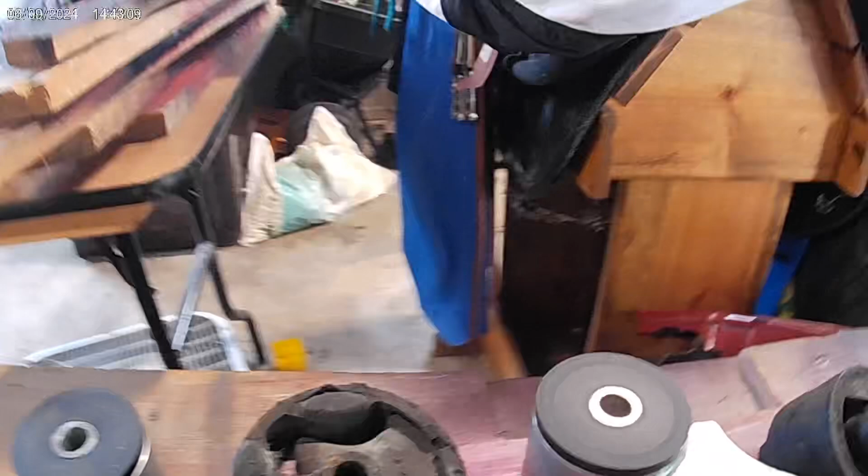Okay, so this mount here is actually a transmission crossmember mount, which goes in the front near the radiator support, and this is the one that goes in the back near the firewall. The most difficult one to try to swap out. Yeah, so this is the pain in the butt boy here.

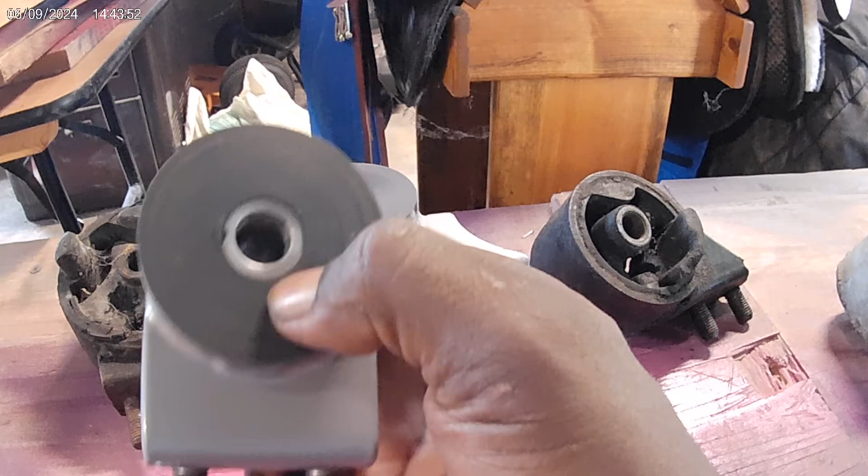So basically what I wanted to do is show you guys how the AWR mounts are made, how thick the brackets are, and the overall mount seems like it's very, very solid. And the rubber and everything, the collar, all that stuff seems really great quality.

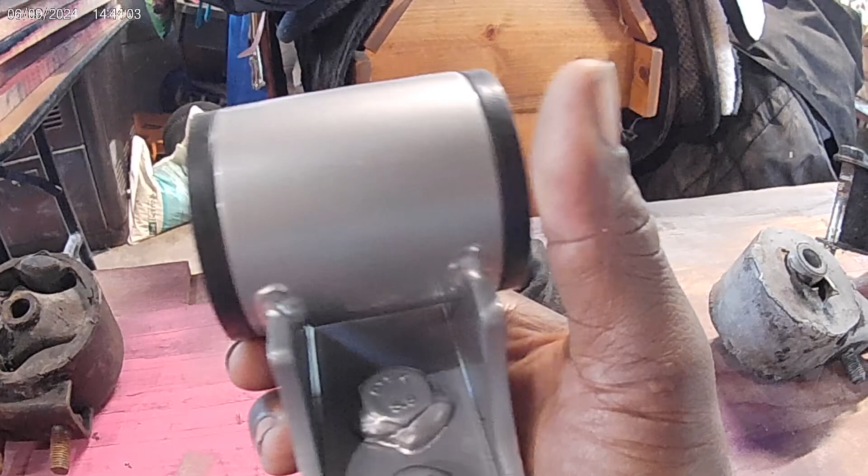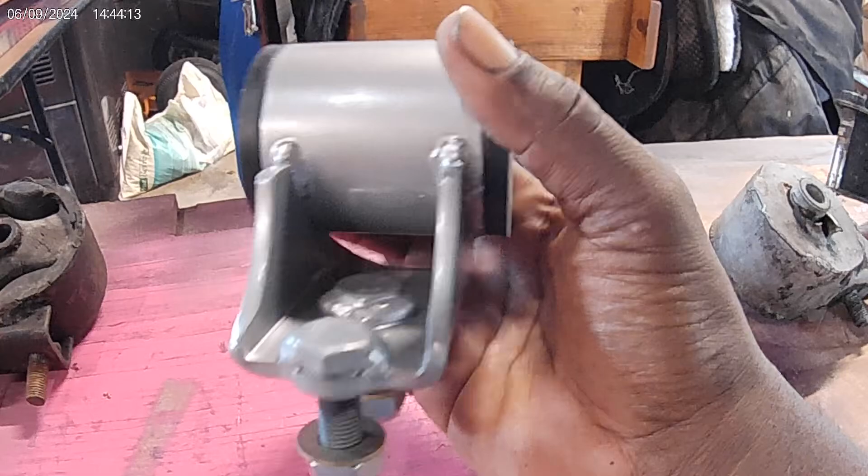I know a lot of guys use these and swear by them. This is my first set, so I'm sure I will not be disappointed at all. But just the construction of these mounts is just awesome, man. They did a wonderful job on this. This is great. The quality of work here is definitely A1, 100%.

And like I said, I know a lot of guys swear by these mounts and have had good results. And I'm sure I will too, especially for what I'm doing with these mounts, drag racing. So yeah, those are basically the AWR mounts, and of course these two mounts here are going to be replacing this bad boy and this bad boy.

Now, so I'll get into a little bit of this. So, of course, as you can see, these mounts, the only thing that's really supporting this rubber is here and here. That's about it. I mean, but it's a factory mount.

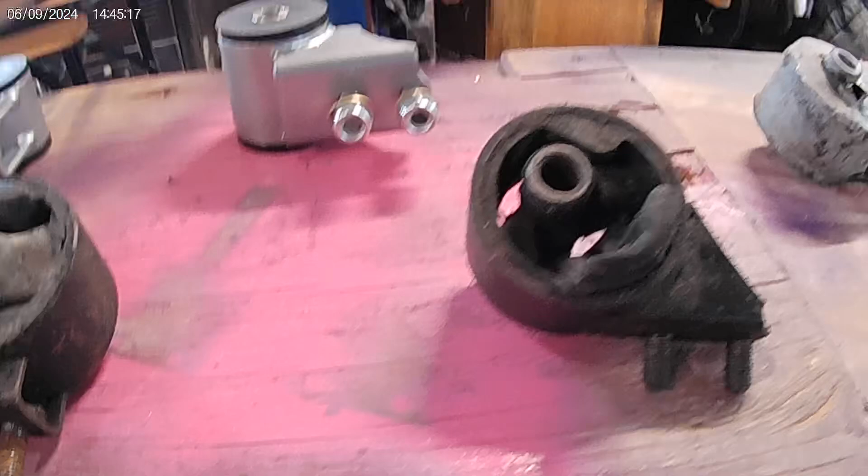You know, these cars, they build these mounts for daily driving. They don't build these mounts for drag racing, circle track racing, time attacks and shit like that. So these mounts are basically made to drive every day, and they're not made to be driven hard, drag raced, making anywhere from 3 to 700 horsepower or even 1,000. They're just definitely not designed for that.

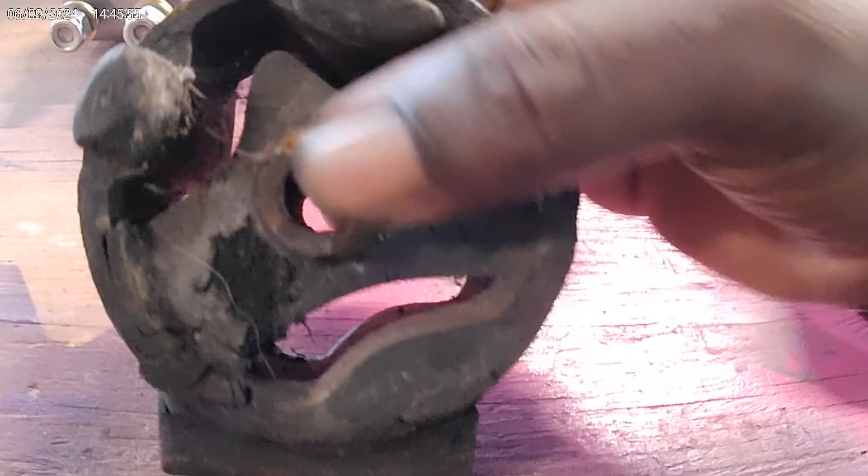So basically what I wanted to show you guys is, check it out. So this is the factory mount, right? What will happen is these things will begin to crack right in here and all around this area. They'll begin to crack, and I believe this one's split. Yeah, see right there? So they'll start dry rotting and they'll crack, and that's what they'll look like.

And then over time, as I keep driving it, it just gets worse and worse. And then, of course, the mount just becomes no good at this point, but it just gets worse and worse as you continue to drive it that way.

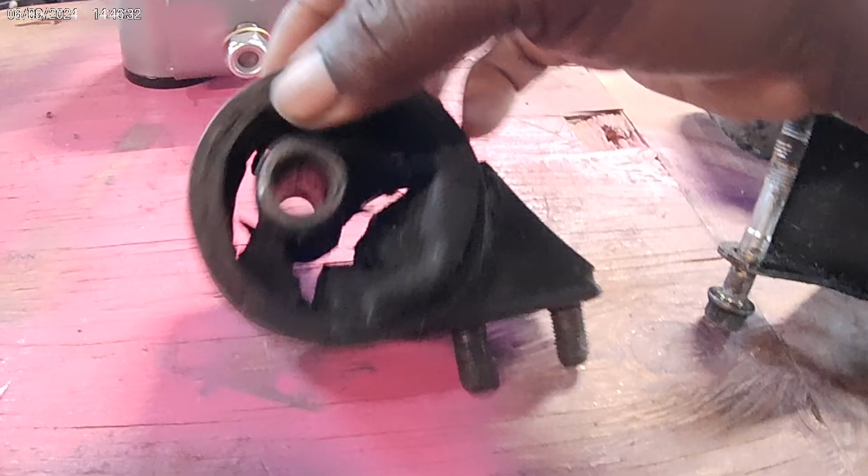And then what takes all the pressure is this one here. So this mount here is the cross member mount, the transmission cross member mount that's actually close to the firewall in the very back. And this bad boy takes one hell of a beating. As you can see, it's the smallest mount out of the whole entire set of mounts. This one takes the most abuse.

It takes the most pressure. And as you can see, this one is just completely blown out. I mean, it's done. But you see there, if you look there, that's all you got holding this thing. That's all you got supporting it. You know what I'm saying? That's it.

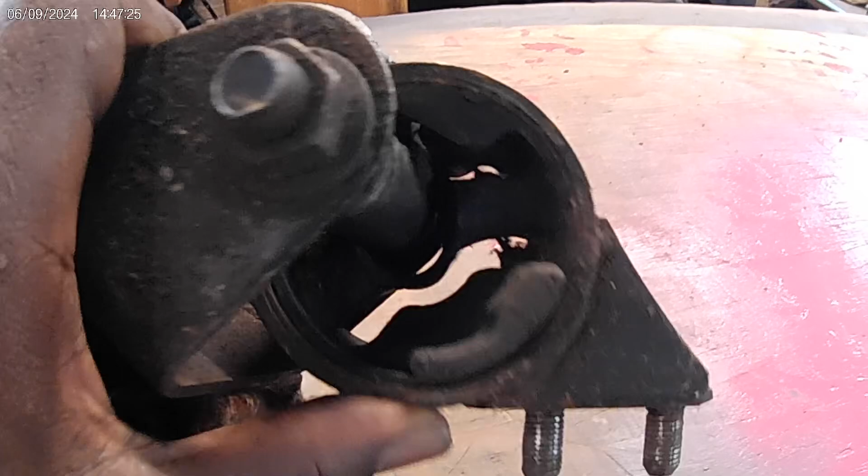So if you lose any of your mounts on the top, like your top transmission mount, your front mount that mounts by the passenger side fender, or the mount that goes down in the front of the cross member close to the radiator support, this mount's done. I mean, you can see this one too, I pulled out of a junkyard. Look at that, this thing is just blown. It's nothing there, it's done, it's gone, nothing left of it. There's nothing really holding it. You only got the center collar of the mount, and this right here. That's it, that's all you got.

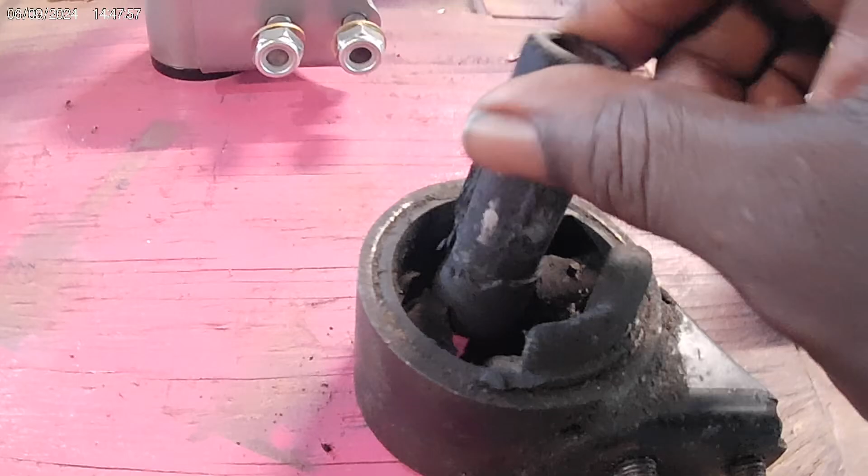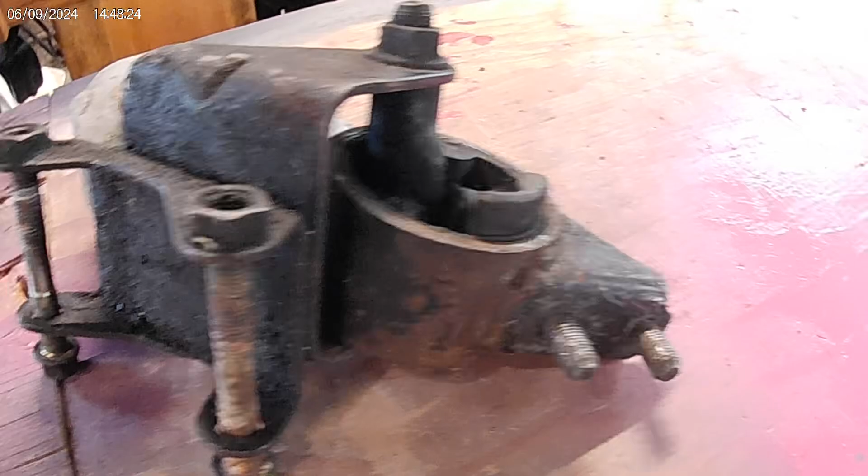And it's very, very flimsy still, even when you buy a new one of these. They're really flimsy at that point. So you can only imagine how much flexing it's doing when you got it in the car. Even daily driving, these are going to be questionable. So if this rear mount was made a little more like this, with a little more rubber in there, it probably would have been a little better. But these factory mounts are just not really made for driving hard. Even in a stock application, eventually they will go bad.

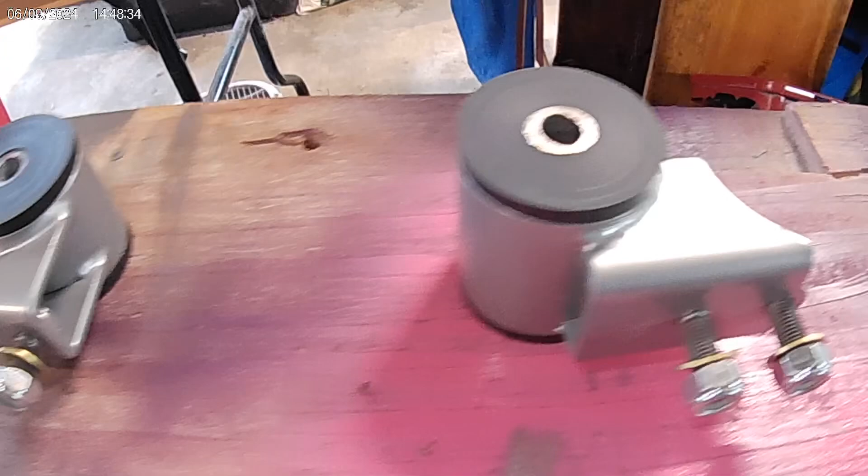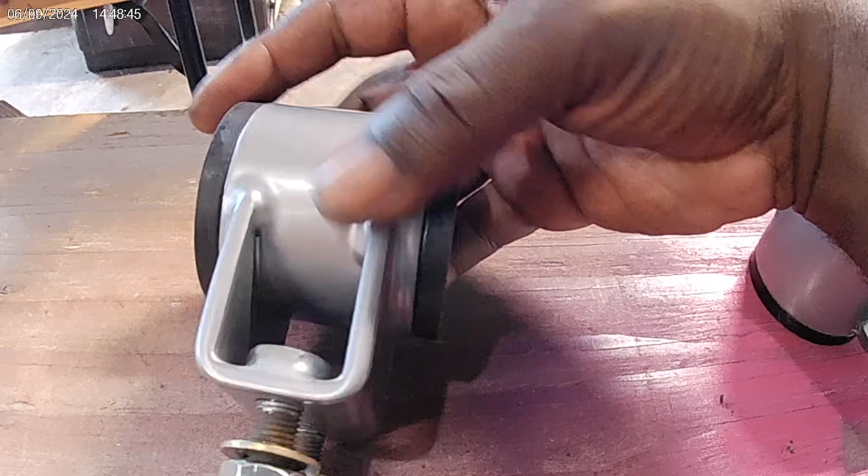So that's where these come into play. Like these mounts here, they cost a lot, but the thing about it is these mounts here will last you years and years upon driving, whether you're driving hard or soft. These mounts will last a whole lot longer than the factory mounts will think about lasting.

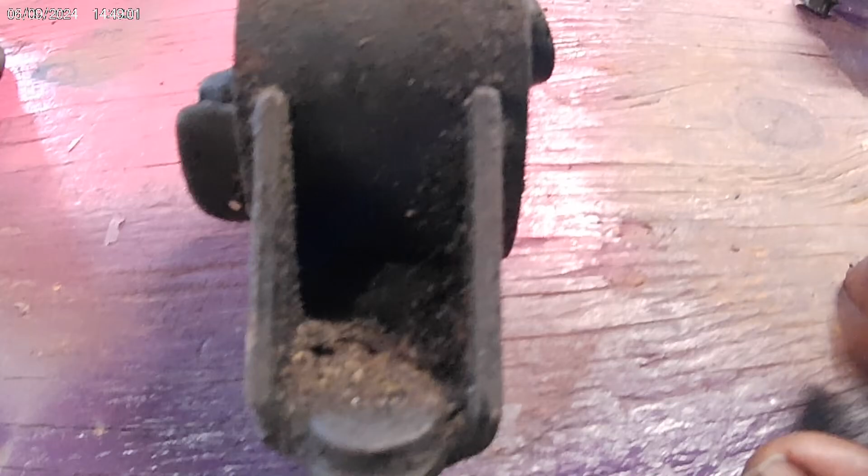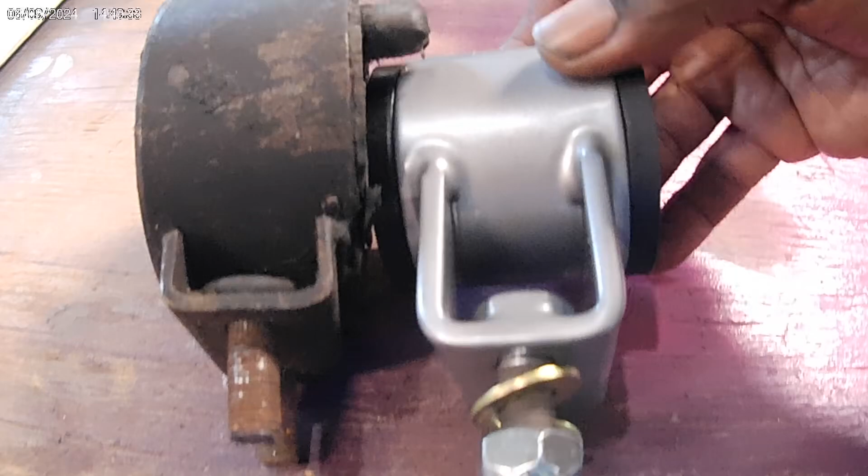Now another thing I wanted to show you, look at the bracket. See how the bracket is on the factory mount? And look at the AWRs, see how much thicker? See how much more metal is there on that bracket? See how much thicker this bracket is than that bracket? So you know these mounts are absolutely set up for some abuse, that's for sure. If you look at that, and then you look at that, that's one hell of a difference there. You're looking at these two, and the AWRs are definitely built to take a whole lot of abuse, and they're built really strong, which is nice.

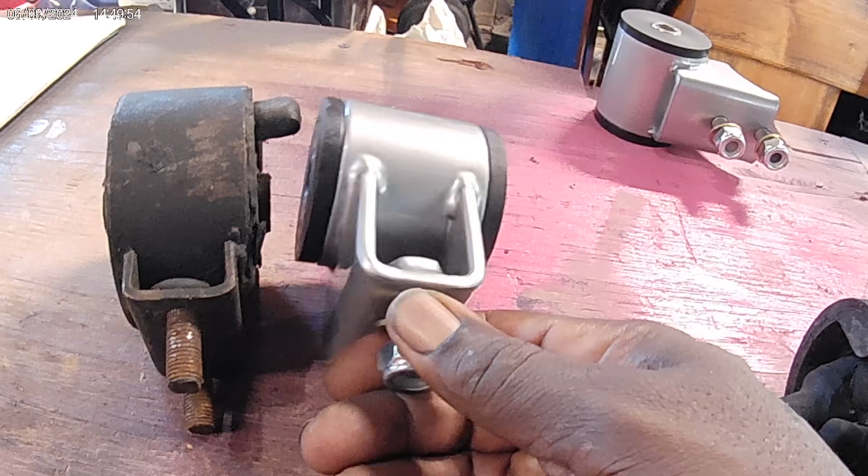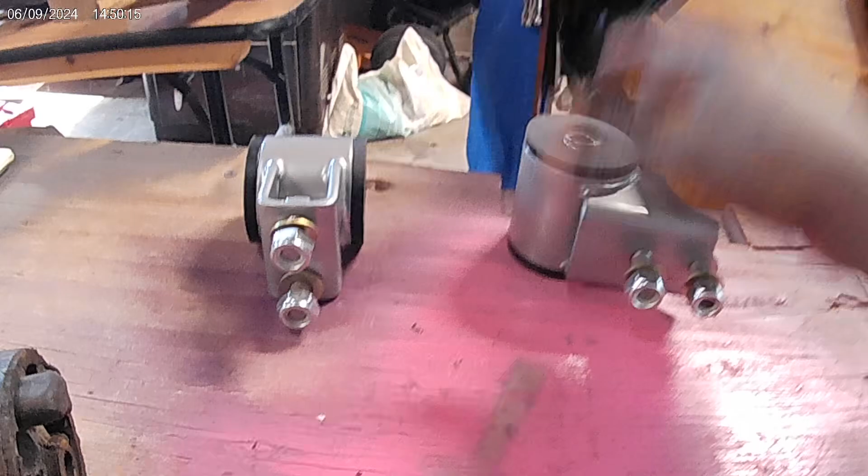And I'm just so glad that they offer these for this car, for the Escorts. The Escort GT 91 through 96, the second generation. Also, these mounts will fit in the LX, 91 through 96. It's the same cross member and pretty much the same mounts, so stuff is pretty much the same. So yeah, they will work on an Escort LX 91 through 96.

So I'll give you guys a rundown real quick. These mounts are compatible with a 90 to 94 Mazda 323 hatchback, which is a BG chassis, the 90 to 94 Mazda Protege LX, which is a BG chassis, and 91 through 96 Ford Escort GT, which is also a BG chassis. So those three cars, these mounts will work in.

And I believe also the 95 to 97 Kia Sephia with the 1.8 BP will also accept these mounts. Now on the 95 to 97, I'll be honest, I'm not sure if it carries the same style cross member as the BG from the Escort and the Mazda Protege. I have to look more into that, so don't quote me on the 95 to 97. I'm assuming they will work because it's the same engine, same transmission pretty much, and a lot of people do the Kia Sephia transmission swap, a lot of guys do the engine swap too. So I could very well be right about the cross member on the 95 through 97 Kia Sephia, and I could be wrong.

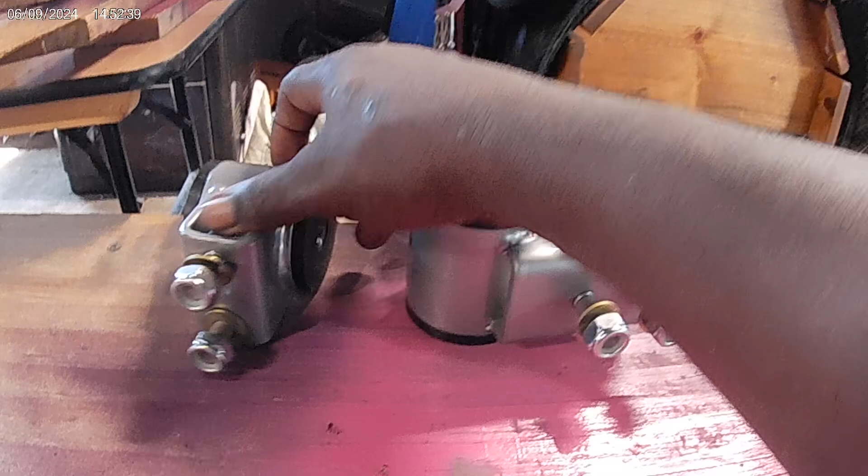All right, so moving right along. I just wanted to get on and show you guys the AWR mounts versus your stock mounts.

Again, this mount is famous for going out. This is the first one that always fails. I think I've mentioned this in my previous video about this mount. If you feel like when you give it acceleration you feel a vibration, and then you get off the gas and it goes away, 9 times out of 10 that mount is done. This mount is actually going bad on Slushbox, which is Jasmine's Escort GT, the automatic.

This rear mount is actually starting to go bad too. I can tell, I can feel it. It's starting to vibrate a little bit driving.

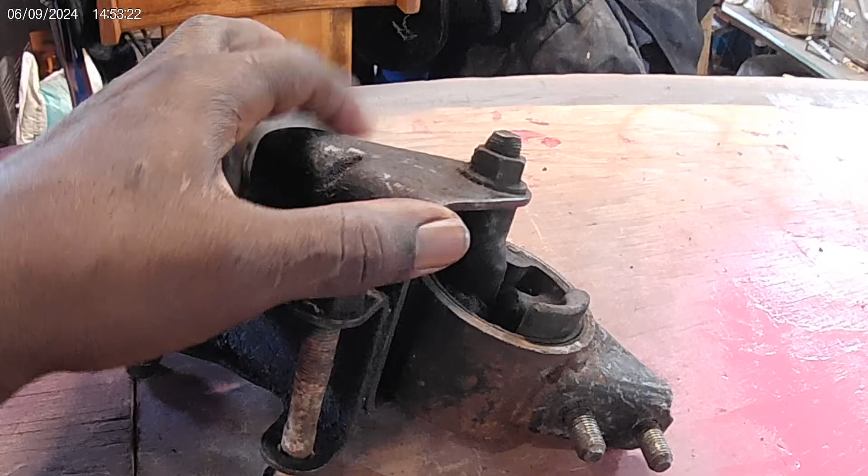But yeah man, these mounts, it doesn't take much to knock one of these mounts out, that's for sure. As you can see, this came out of the junkyard off a transmission, and this is how I found it.

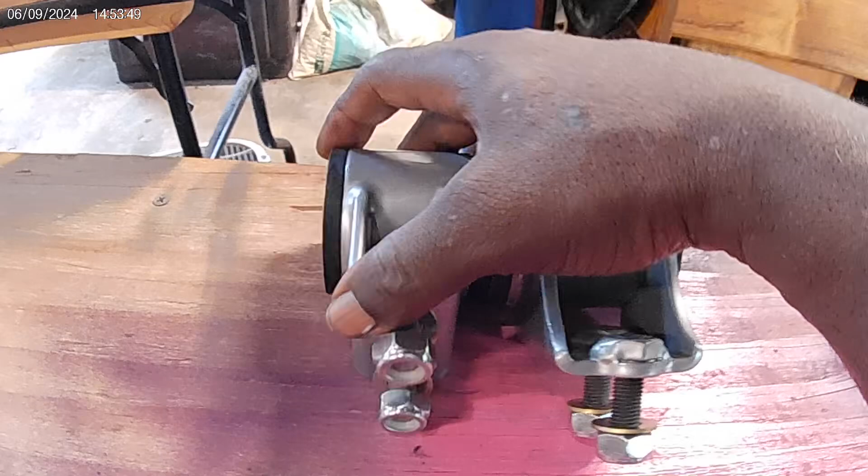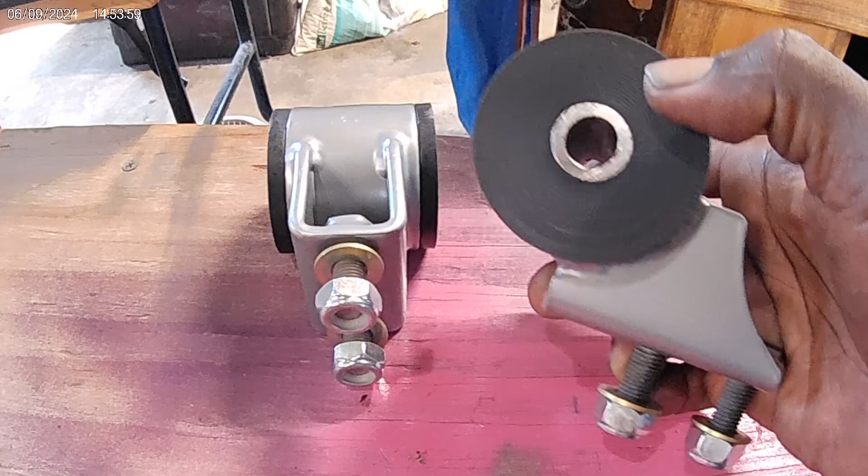So that's basically what you have there. You got your factories versus your aftermarket AWRs. Like I said, the AWRs are just built a hell of a lot nicer. They use a lot thicker brackets, nice powder coat finish, very nice urethane bushings, with nice collars and stuff, lock nuts, washers, all that stuff.

All right, so I wanted to show you guys something. I got the rear mount out of Donatello, and that's what I found.

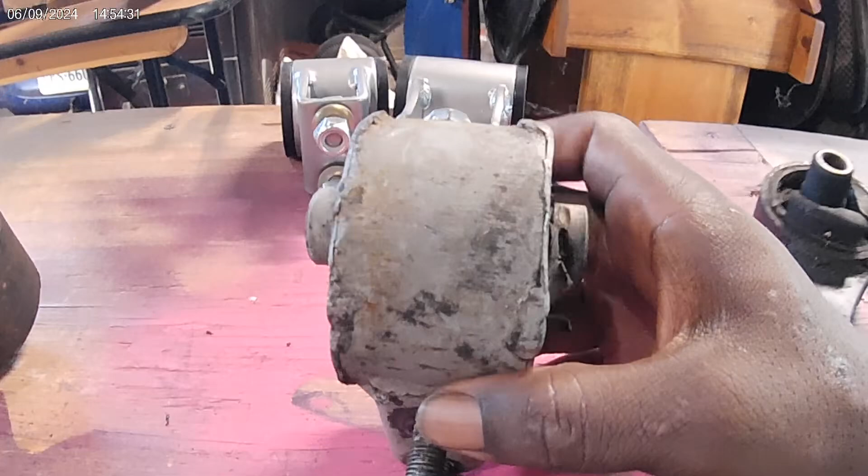So I reinforced this mount right here about 3 years ago, maybe 4, probably about 4 or 5 years ago. And of course this was the same exact mount when I rebuilt the engine back in 2021 and had it tuned and all. This was the same exact mount I used.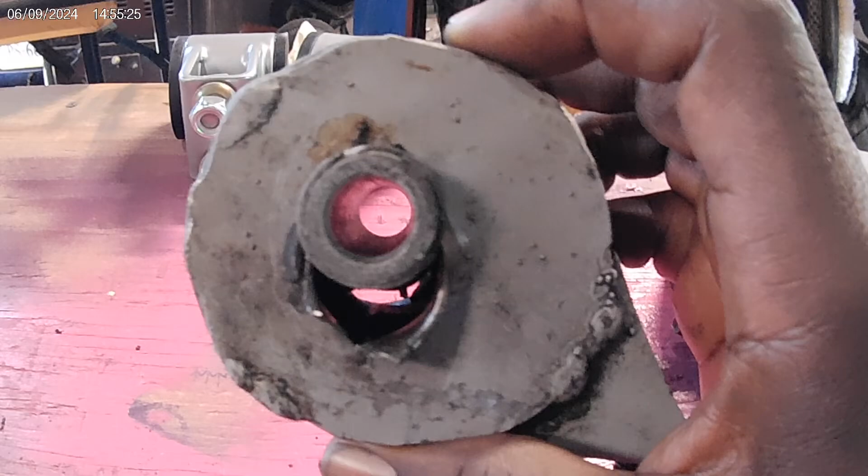Now mind you, the steel I used wasn't very thick. It was probably like maybe a 16th to an 8th. No, I'd say it was probably 1/8 inch thick. Maybe 1/8 inch, it might have been a 16th of an inch thick. I can't exactly remember, it's been a while. Looking at it, it's probably a tad under 1/8 inch. It might be 16th, it's just hard to tell.

I can't remember, but anyway, this is what I found when I pulled the mount out, and I seen that and I'm like, oh holy shit. This mount is smoked, 100% smoked. As you can see, it just rode the steel so hard, rode the metal so hard on this collar, it just opened it up, and you can see right there it actually split it.

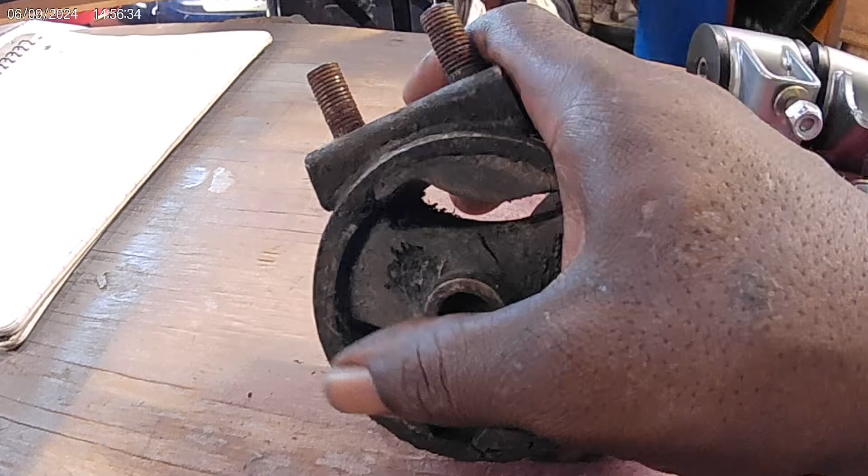So that tells me right there, of course, that the other mounts I had in the car were shot as well, like this mount. Actually, I believe the front crossmember mount on Donatello was welded, and I think I got that one from Manuel. That one actually had a plate that ran across from here to here, and it was all welded solid. So that one lived, that one actually survived.

This one did not. And then of course the upper transmission mount, it had cracks in it, it was split.

That one was split, and then the one over the front mount, over by the timing cover, that one was split too. So those two mounts were shot. The only good mount you really had was the lower front cross member. So this one took a heck of a beating because of that.

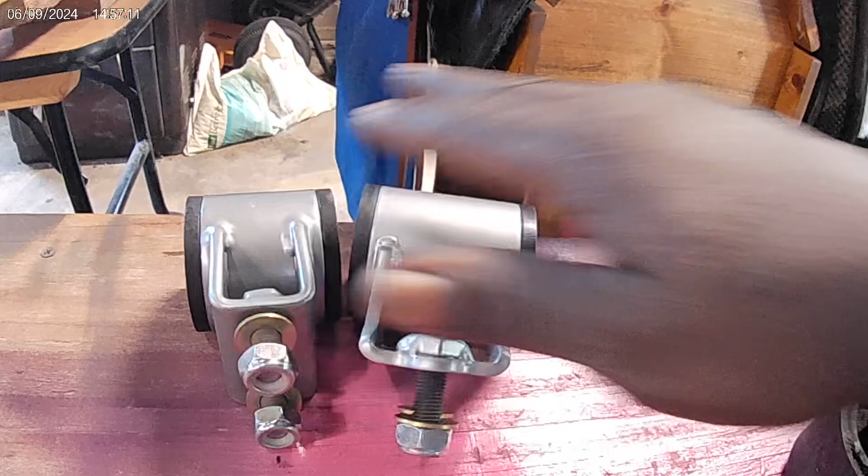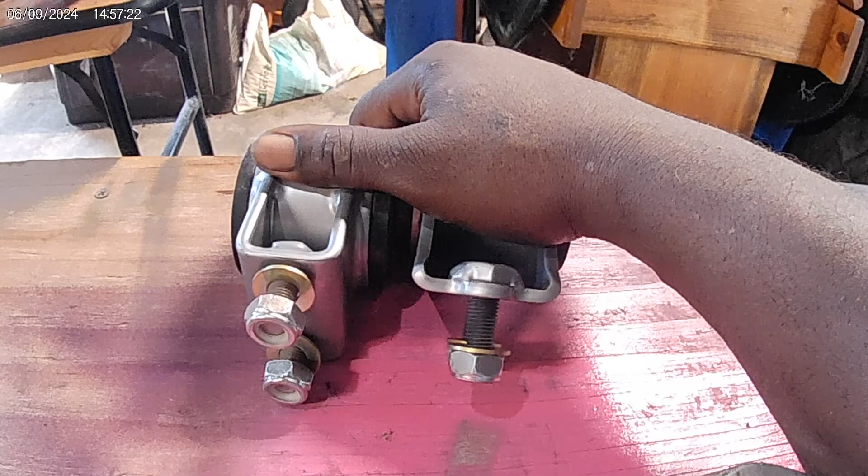Good thing I'm changing these out. I'm changing all 4 out. I only got these 2 from AWR, which is the lower cross member, which is the most important, because these mounts right here is what withstands the engine torque when the engine's torquing up and pulling, and when it's torquing forwards and backwards. These two mounts right here is what takes that pressure.

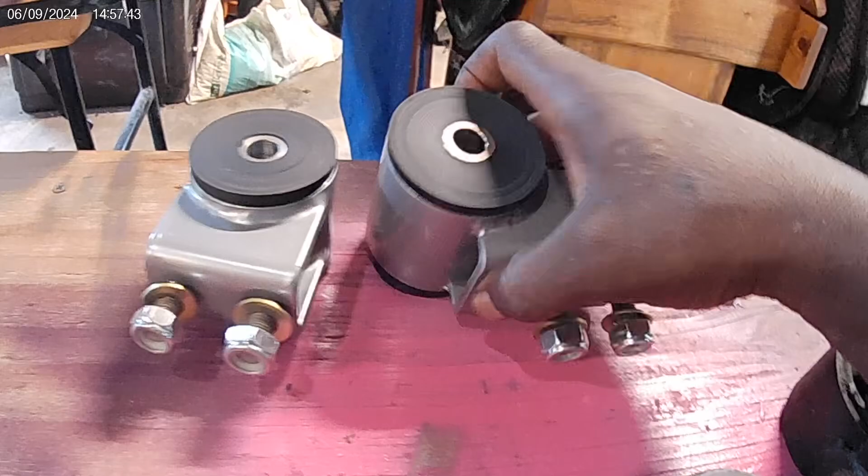So the ones on the top don't take as much pressure unless you got a mount that's out of place, bad, or just severely tore up. These mounts right here are your lower crossmember mounts, transmission crossmember mounts, and these two mounts right here is what takes the engine torquing forward and backwards. So those are your most important.

So I have some brand new factory replacements that I'm going to put on the upper transmission mount and on the front mount over by the timing cover. I'm going to replace those with just regular stock mounts until I can see if I can get the other two from AWR for the front and the upper transmission mount. But for right now, I'm just going to use these.

I'm sure that'll be a whole lot better than what I had going on, as you can see there. Got to be way better than that. You know what I'm saying? So that mount is shot. As you can see, it held up because I welded the plate on the outsides here and here back 4 or 5 years ago. It just wore that metal right on down. It just wasn't enough to hold it. Hey, you live, you learn, you fabricate, stuff like that happens, and that's how you learn, man.

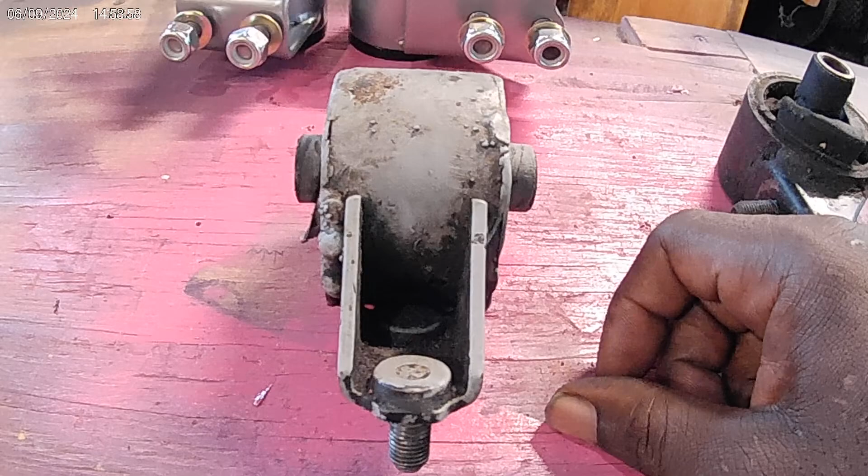And I'll be honest, man, I was like, man, I don't need no AWR mounts, man. I can reinforce my own stuff. I don't need no AWR mounts. Rephrase that. What was you saying? So yeah, you said you didn't need no AWR mounts. According to that, yeah, you did.

100%. So cool, man, I just want to get on and share this with everybody real quick. Yeah, that's one of Donatello's mounts, and yeah, that's bad. But just want to get on and share some motor engine mount knowledge on AWR and the stock factory mounts, whether they are on the lower, whether they're on the transmission cross member, or the one by the timing cover, or the one over the upper mount by the upper transmission mount that's underneath the battery tray. Just wanted to give you guys some little knowledge on those mounts.

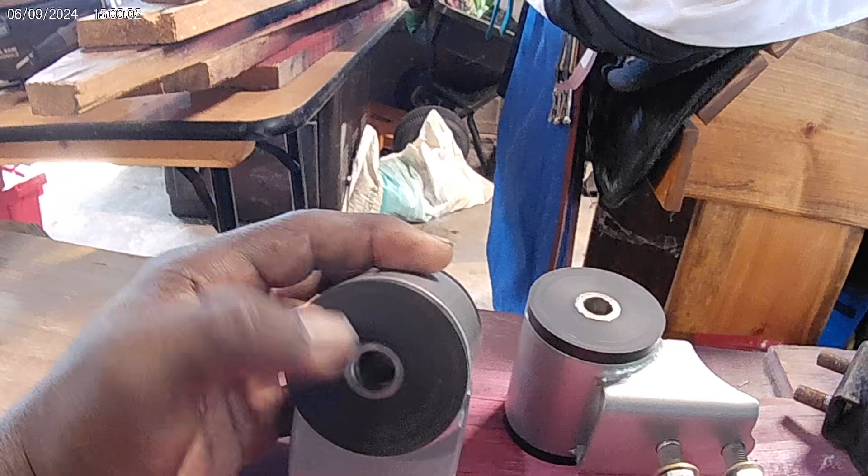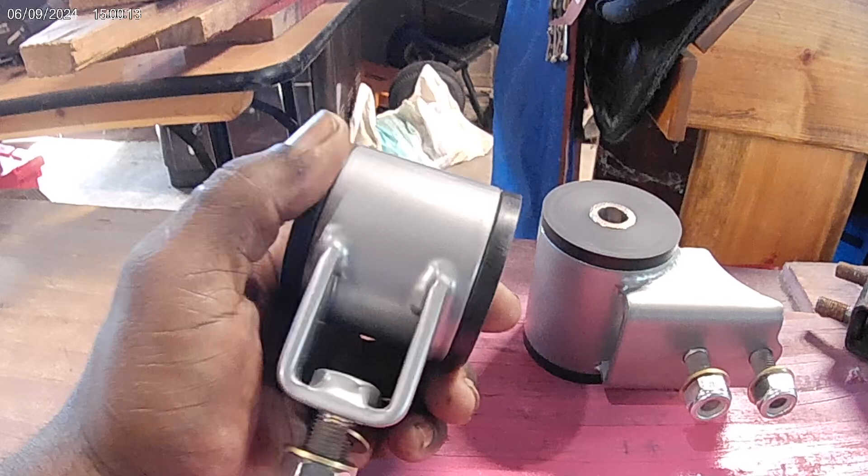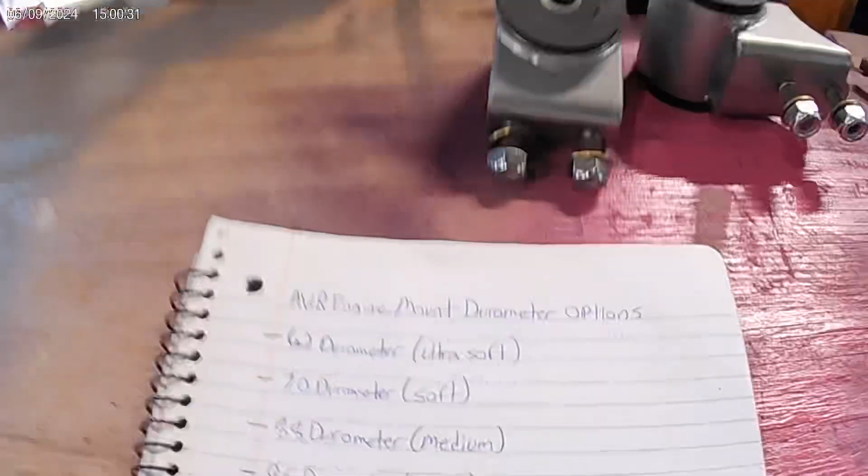Also, while I got y'all here, these mounts have 4 different durometers. What that means is this urethane rubber comes in 4 different levels, 4 different durometer options. So you have 4 to choose from. You got a 62, a 70, an 88, and a 95. I wrote it down so you guys can see what I'm talking about here. AWR mount durometer options: 62, 70, 88, 95. And those are all durometer.

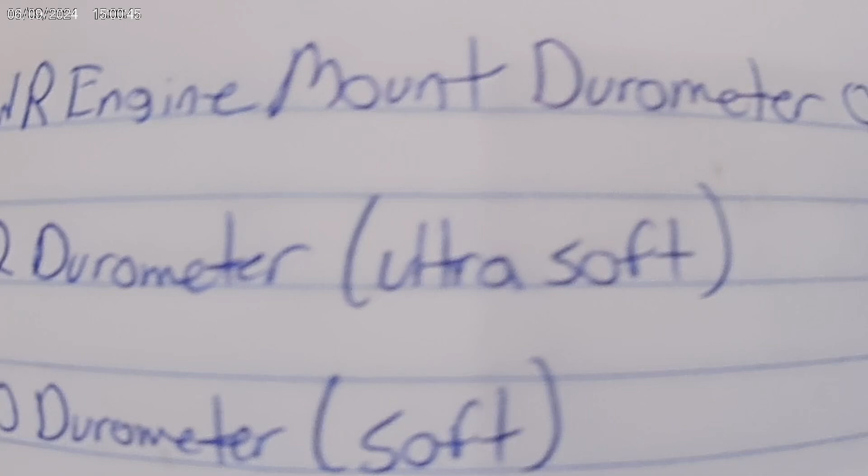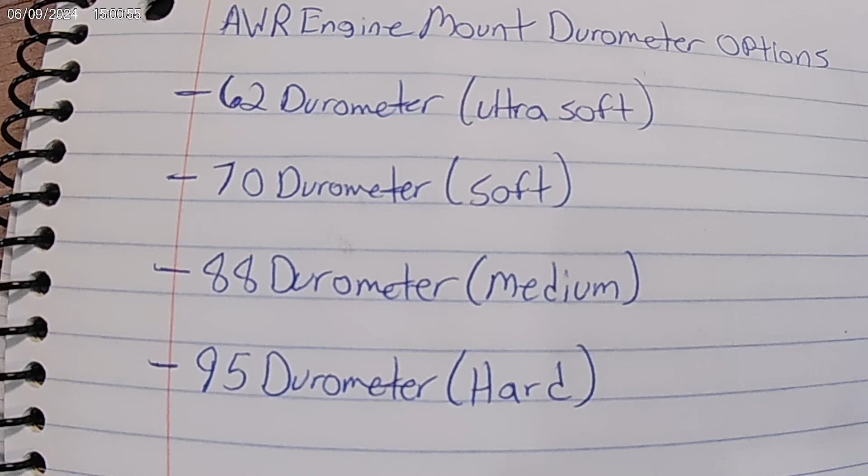We got ultra soft, soft, medium, and hard. So 62 durometer is going to be ultra soft, 70 is going to be soft, 88 is going to be medium, and then 95 is going to be hard. So basically what durometer stands for is the hardness, how hard this urethane is. So durometer is basically hardness. These right here are 88 durometer. That's what I went with.

I really didn't want to go with the 95 because the 95 durometer is hard, a very hard urethane, and that's a whole lot of vibration. I know I've heard a lot of people complain and say, oh man, the AWR mounts suck because they vibrate your teeth out. Well, 9 times out of 10 that's probably because that person got the wrong durometer urethane. You got to get the correct durometer urethane for your mount application. You can't just be street driving around cruising without a whole lot of mods done and go with a 95 durometer and wonder why the thing is shaking your teeth out. No, you don't want to do that.

So the best thing I recommend you do is call. I got my mounts through Fab 9. I'm sure you can contact AWR as well, but I always go through Fab 9. I talk to Brian at Fab 9.

Brian at Fab 9 is a really good guy. Customer service is just A1. Awesome person, man, really down to earth. I've had a few conversations with him, love the guy to death. He's been helping me out since 2021, and I really do appreciate all the help he's given me throughout my builds and stuff like that. This guy's awesome. So what I would do is just contact Brian at Fab 9.

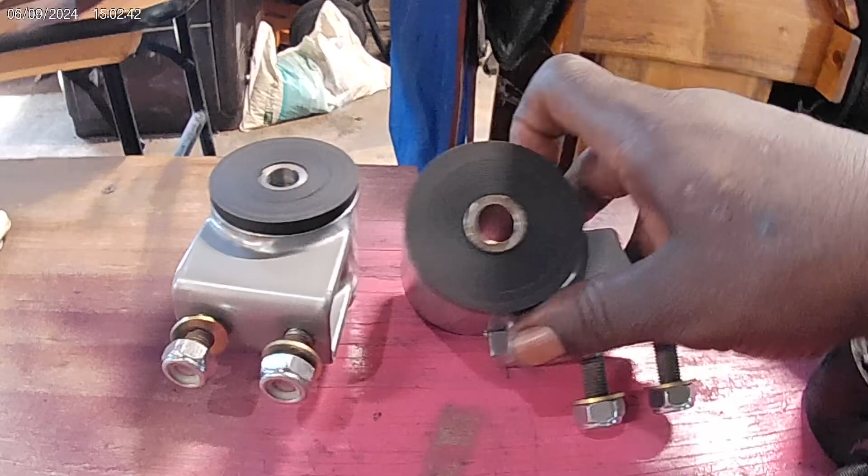Let him know that, hey man, I'm looking into some AWR mounts. I have a 91 through 96 Ford Escort, which is the same chassis as the 90 through 94 Mazda Protege LX, and I'd like to get me some AWR mounts.

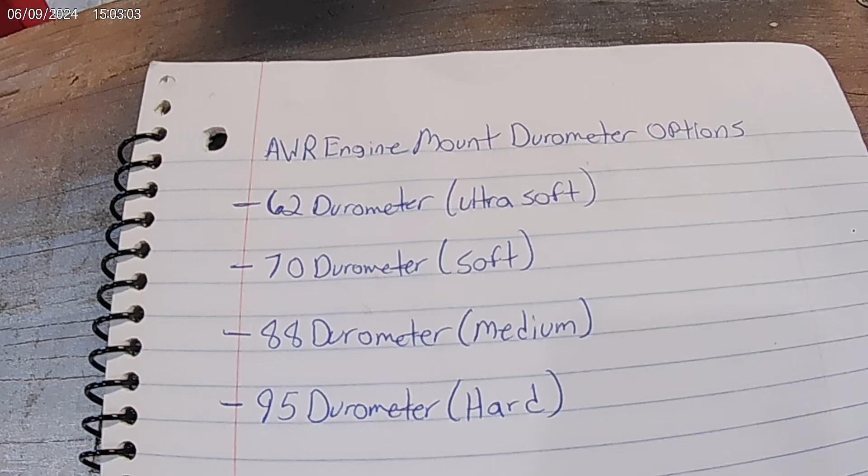He's probably going to ask you what durometer you want. He's going to say, hey man, what's the durometer you're going to want? And he's going to give you the options. My best advice to everybody is just tell him, say, look man, I just ride the car around, cruise on the street, stuff like that. I don't really have a lot done to it.

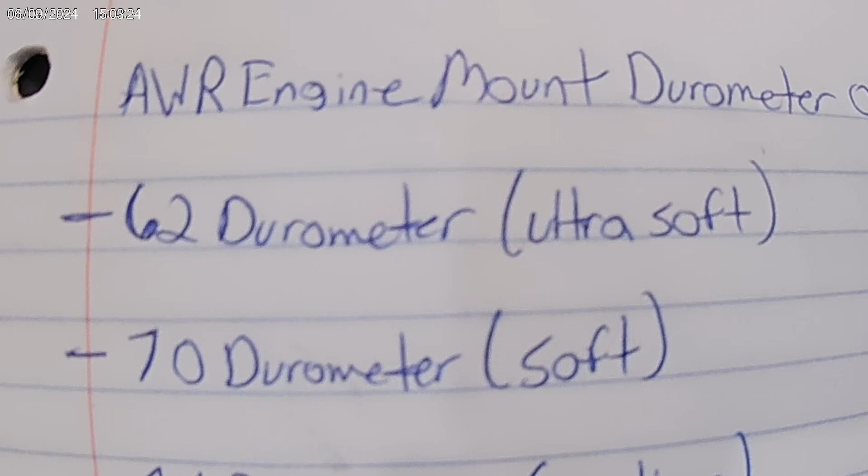And he's going to probably tell you you're going to need to choose between 62 and 70, because you got ultra soft and soft. So he's probably going to say, hey man, you're probably going to want like a 62 to 70. We got ultra soft and we got soft on those durometers.

Then, if you say, well yeah man, I got some mods done, running a turbo or nitrous or supercharger, or I got ITBs on an all motor setup, I got this type of clutch, yada yada, I'm running like a stage 3, stage 4 clutch, what durometer should I go with?

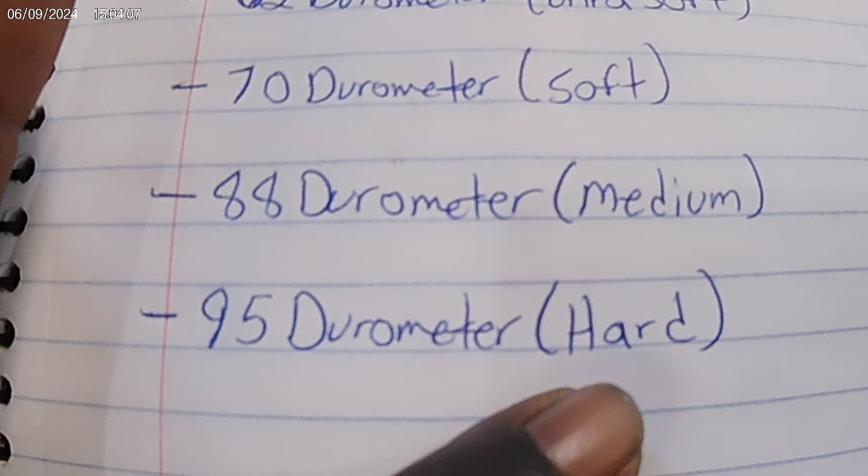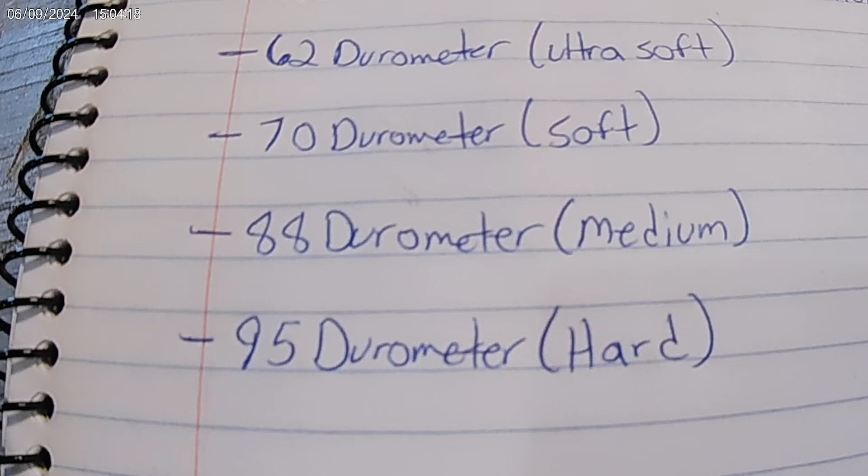9 times out of 10, he'll probably come and say, well, if you're running those kind of mods, you might want to go with an 88 through 95, because you got hard for 95 and you got medium for 88. So the 88 is going to be more street/track. 95 is going to be more track. You can run 95s on the street, but they're just going to shake your teeth out.

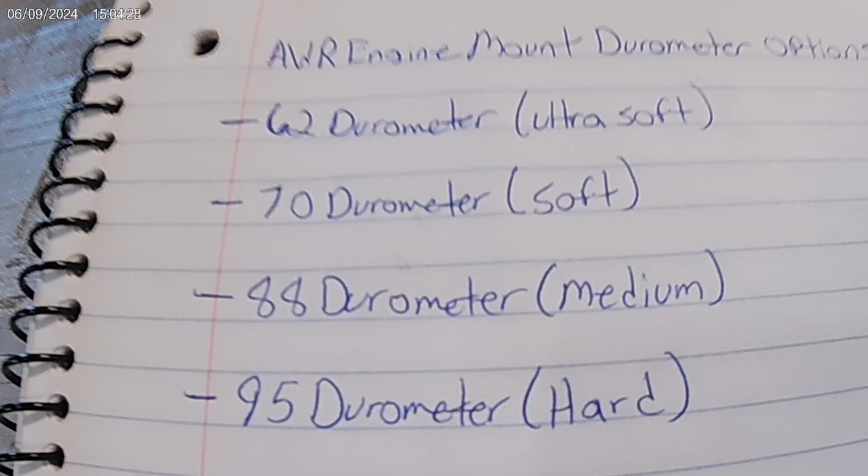Trust me, I've had solid mounts before in a car. They suck. They 100% suck. I can tell you from experience, they suck. Don't do it. Do not do it. I'm telling you now, I'm warning you.

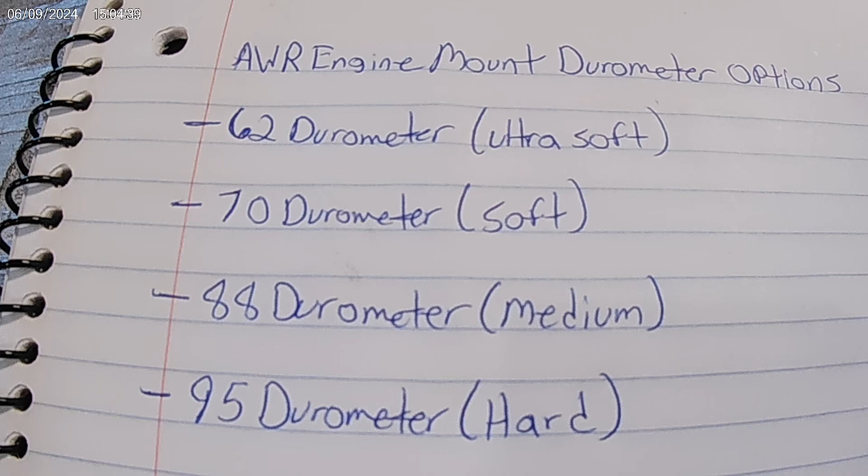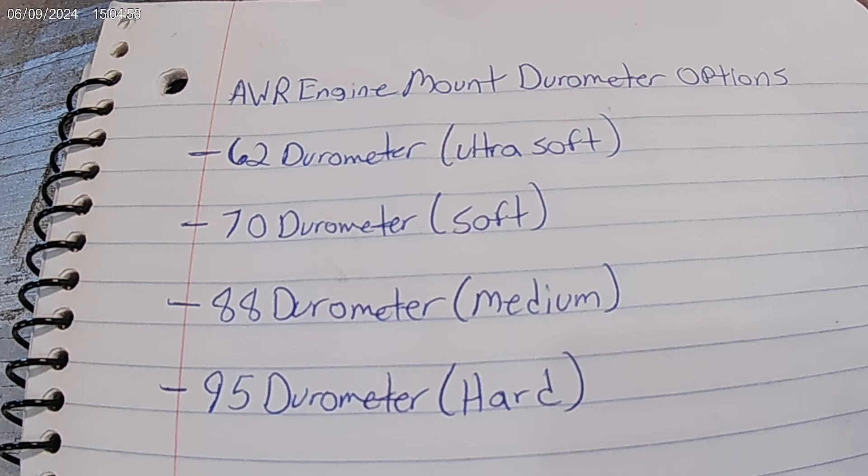If I see anybody on the FEOA page say, I bought these AWR mounts, man, and they suck because they vibrate really, really bad, and I ask you what the durometer is, and you tell me you don't know or can't remember, or you say I got 95, I'm going to tell you I had this conversation on my YouTube channel, and obviously you didn't pay attention. So go back and review it again.

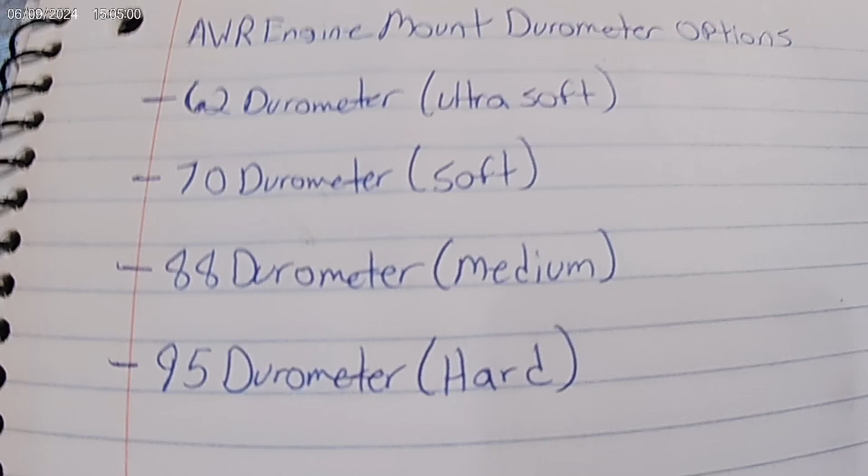So yeah guys, just make sure you choose the correct durometer rubber for your application. Don't just buy anything, you know. A lot of people get twisted up in that. They just say, I want some AWR mounts, and that's all they know. They just want AWR mounts. But you got to know the detail.

You got to know how hard you want these things, because you could tell them, oh yeah man, give me the 95 ones, I want those to be hard. But then you're just regularly driving, now you got a stoplight and that thing's idling, or if you got cams or anything in it, man, that thing's shaking your teeth to death, shaking you to death for no reason.

You know what I'm saying? So if you ain't got to go that hard, don't go that hard. 62 and 70 durometer is good for street driving, maybe a little bit of playing in the street with some very, very light to moderate to no modifications at all.

88 to 95 durometer is what you want for turbo, nitrous, supercharger setups, or some awesome naturally aspirated mods like cams, high compression pistons, a clutch, a header, exhaust, stuff like that.

88 to 95 is what you want, because sometimes, depending on how you drive the car, 62-70 might be too soft for you. You might need an 88 or 95, you know what I'm saying?

Just contact Brian at Fab9, and he will be able to 100% help you out with the mount choice. If you guys are not sure and can't get a hold of Brian, you can contact me, I'll try to help and walk you through selecting the right mounts.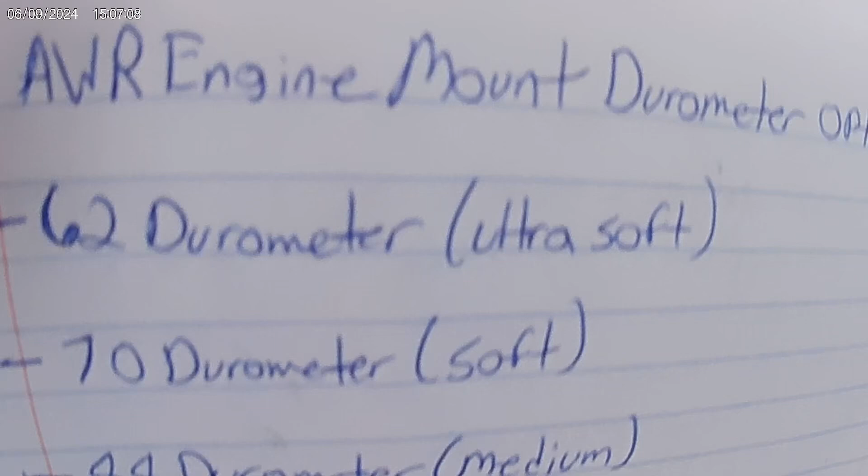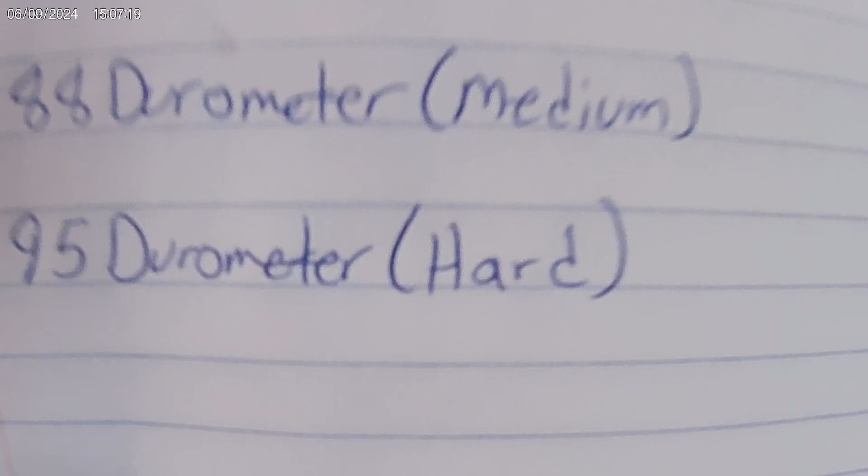So again, here's the list: 62, ultra soft. 70, soft. 88, medium. 95, hard. So just remember, 95 is hard, and get your mind out the gutter, people.

So yeah man, that's basically it. I just wanted to show everybody and tell everybody about these mounts, give everybody some knowledge on these mounts, how the factory mounts react to certain things, and of course what they should be replaced with.

Regular OEM mounts are not going to cut it, especially if you got any kind of modifications or anything like that, they just ain't going to cut it. I mean, you can see these things are tore up, they've seen better days.

So basically, just wanted to get on and share this with everyone, and hopefully this YouTube video has been very helpful, very knowledgeable, and very detailed, so hopefully you guys that need these type of mounts will be grabbing these bad boys.